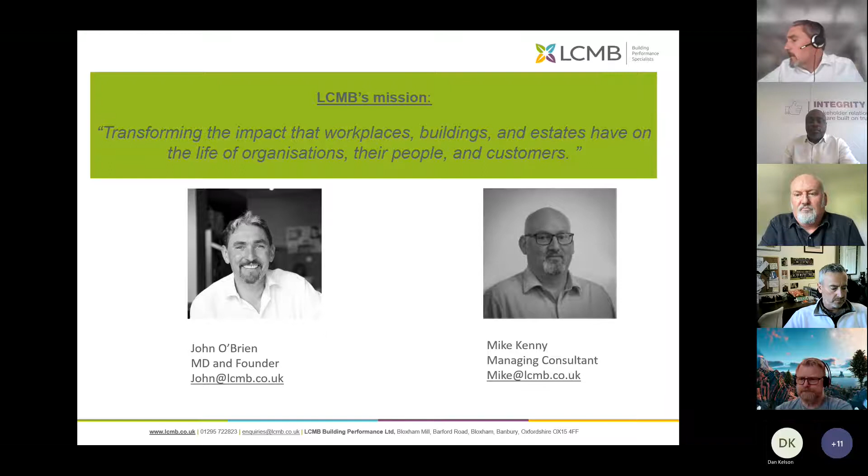So my name is John O'Brien. I'm the MD and founder of LCMB, for those of you who haven't met me. And Mike Kenny, my colleague, who's the managing consultant of our energy, carbon and net zero carbon team, will be chairing today's discussion. Just to say a little bit about LCMB, our focus is on transforming the impact of our clients' workplaces, buildings and estates. And part of that is helping our clients with the transition to net zero carbon.

So the objective for today is to share insights from our guests and Mike and tips for your route to achieving net zero carbon in construction, the construction and management and operation of built assets. So as a business, I guess we've been working with the UK GBC framework for delivering net zero carbon built assets over the last decade or so. Mike will say a little bit more about our recent work, but we've been involved in looking at both embodied carbon and operational carbon through the delivery of new built assets, refreshing existing built assets, as well as delivering net zero carbon strategies for scope 1, 2 and 3 across large complex buildings and estates.

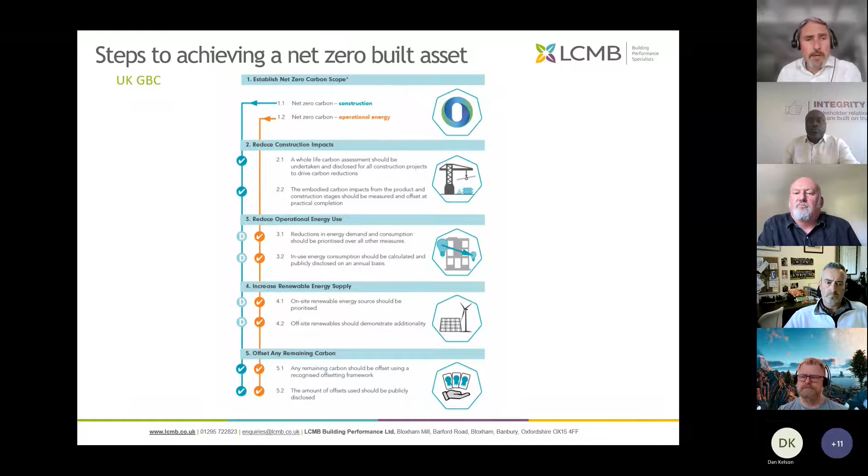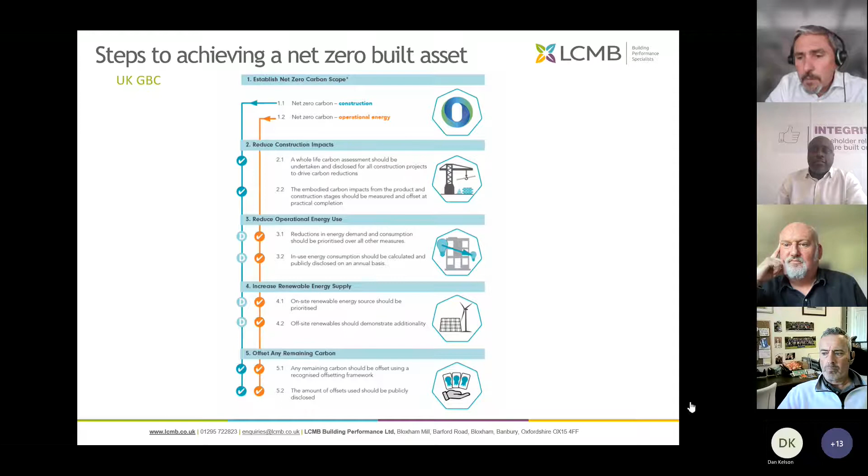So we've touched both the sort of new build, the operational side of built assets, but we're really interested to hear from both Stuart and Adi today as to their insights from the construction of, I guess, built assets at either end of the spectrum. Adi's involved in major projects and infrastructure, and Stuart's involved in delivering sustainable net zero carbon houses. So I'm going to pass to Mike, who will introduce himself and the guests and take us through the discussion for today. So over to you, Mike.

Hello. Yeah, thanks for joining us today. Just to introduce myself, I'm managing consultant here at LCMB. So I focus on the energy and carbon and net zero side of things, working with lots of different clients, higher education, NHS, commercial sector. Net zero has all become very topical and there's a lot of demand for it. And given the public sector decarbonisation scheme, even more incentive for people to decarbonise.

So I'd like to welcome Stuart and Adi, our two speakers for today. And if we could start with Stuart, if you could just tell us a little bit more about yourself and your presentation.

You're on mute there, but we can see the presentation. Okay, so is that better now? Can you hear me better? Mike? Yeah, we can all hear you. That's great. Okay, perfect.

Right, welcome everybody. My name's Stewart Dalgarno. I'm the Director of Innovation and Sustainability at Stewart Milne Group. We're a dedicated house builder. I'm also the Project Director for a large-scale UK flagship housing innovation project called AIMCH, which stands for Advanced Industrialised Methods for the Construction of Homes. This project is now complete. There is a website, which I'll come to at the end, where a lot of content is available for you to see and get good insight into.

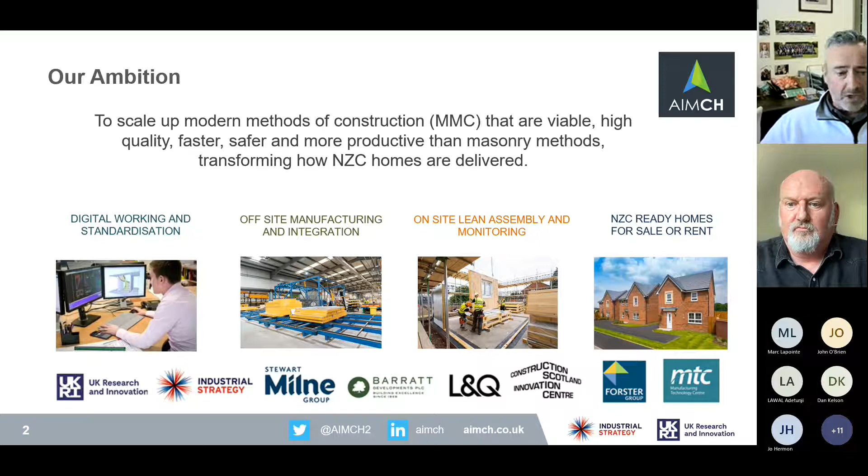And we've built homes to current regs, enhanced regs, and net zero carbon concept homes suitable for both the private development market and the affordable market. So as part of this project, our achievements have been to effectively build a net zero carbon home. We believe the first, called the Z House, by Barratt with Salford University. I'll talk more about it in a minute.

We've developed low carbon manufacturing systems, including full scale robotics for the production of panelised MMC systems at scale. We've also developed digital twin factories for net zero carbon factories to produce additional capacity to service the demand for MMC systems. And we've also done a little bit of work on embodied carbon, looking at the benefits of timber panelised MMC systems versus brick and block constructed homes.

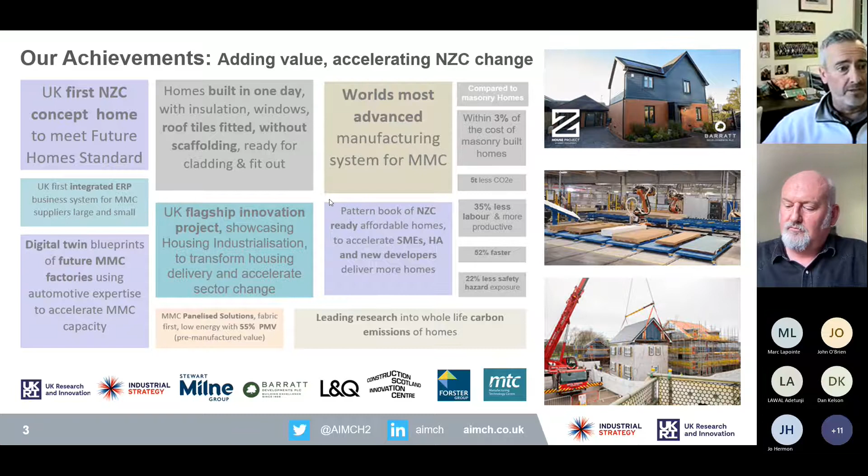Our focus has been on low-rise housing, and on a fabric-first approach, a sort of fit and forget solution to building a high-performance, low-energy fabric that drives the energy performance of the heating system down, and then decarbonisation after that. We've used techniques which are scalable and viable, so we're within 3% of the cost base of masonry, which is quite a good price point to be at. And some of the images you're seeing on screen there are some of the technologies we've used.

So for example, a closed panel, timber frame, fully insulated, sealed, windows pre-fitted, floor cassettes pre-manufactured up to 12 metres long by 3 metres wide, prefabricated party wall panels with the fire protection pre-fitted. Image in the bottom right, effectively a house built without scaffolding, using an edge protection system. And the house on the bottom left is a fully tiled roof built on the ground, lifted on. So that house there is at Barratt's development in Warrington.

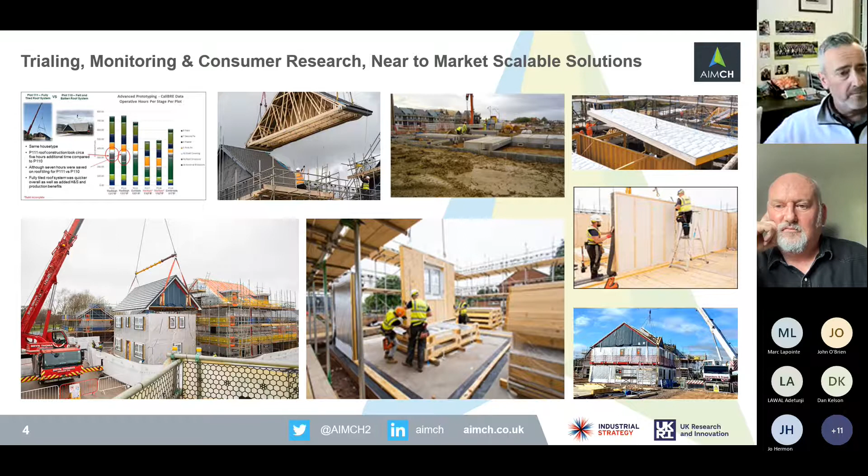So fully insulated to about a 0.15 U value, air tightness of 3, windows pre-fitted, plasterboard loaded in, floor cassettes on, roof on, no scaffolding, fully tiled in just under 7 hours. So that allows the contractor to effectively finish off the cladding by putting a brick veneer up the outside, a traditional cavity, or lightweight cladding if they wish, and fit out the remainder inside in terms of the first fix and second fix works. We've also looked at prefabricated foundations and modular roof systems, all of which have been monitored and trialled through having full-time research students on site doing time and motion studies. And that's given us the data to make really informed business cases.

The thing that's maybe most interesting to you is effectively the first net zero carbon home, which is known as the Z House. This was at Salford University with Barratt Homes. So the image on the left is one of their standard products. It's an Alderney house type, a common house type that Barratt Homes build. It's pretty much a vision of the future.

It's an MMC fully produced home, panelised systems with a lightweight cladding on the top and a prefabricated brick veneer on the outside. Inside, we've got vehicle grid charging, PV on the roof, PV diverters to the cylinders, an air source heat pump with storage, skirting heating, and infrared heating. So it's pretty much full of the type of technologies that are going to be used in the future.

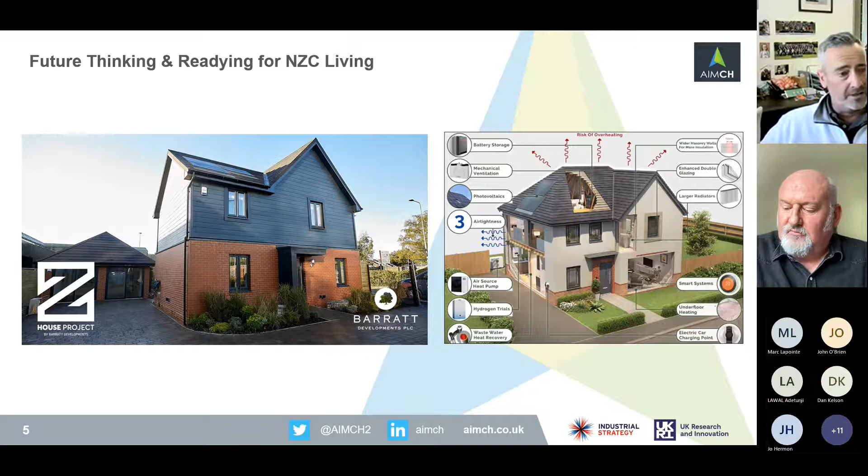And part of the project beyond this is to monitor that home and to have people living in it. It's got a lot of sensors in that building monitoring the performance of the home as we move to these kind of new technologies going forward, which are going to be our mainstream solutions for our transition to net zero carbon as a housing provider. In addition to that, we've looked at things like the manufacturing side of the MMC systems.

So embracing the car industry techniques that we've seen in images in the past, I'm sure, we find it difficult to get labour to work in these facilities. And if we can automate things and use some of the BIM technology with standardisation and components, we could then deliver higher output in terms of producing product at pace and at low cost, which is kind of the key output.

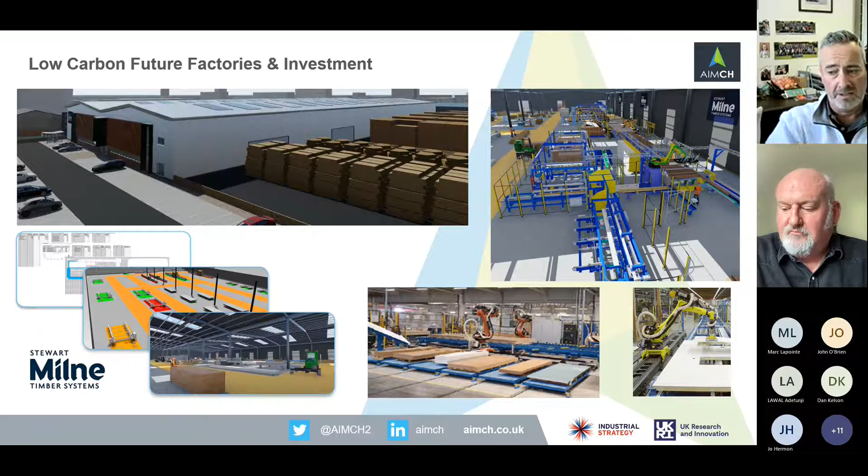Couple of things to finish off with then. We've also developed a pattern book of net zero carbon ready homes. So through our whole ethos of design standardisation, we've got a range of affordable homes, 18 homes in total, from a bungalow right through to cottage flats, which are compliant with the NDSS spatial standards, fabric ready to take a heat pump or can take a heat pump now, so they can be net zero carbon in the future. All crane friendly, panelised MMC friendly and optimised.

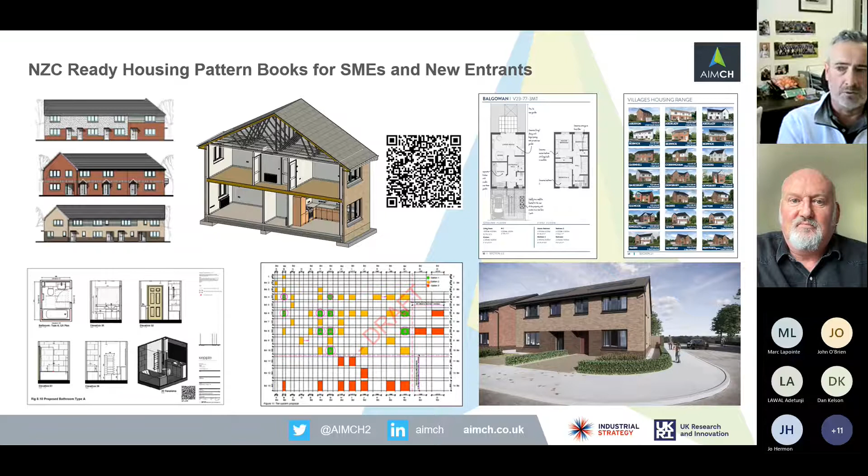And one example of that is the image on the left, which is essentially bathroom pods. So in the future, we could actually drop in a bathroom pod as part of the prefabrication element. So you might remember the first image on the slide was that shell being built in a day. If you imagine that shell being built in a day and that bathroom being dropped in, you've probably got 85% of the work content of the home completed off-site, being brought to site with a very smart way of building it on site.

So the last thing we did was embodied carbon, just to assess transition towards low carbon materials. As a house builder, we're interested in this. We've always used timber frame for our systems, but not everybody does that. It's quite common to use brick and block. So the first 2 columns are the ones worth looking at. 216 tons of embodied CO2 compared to 221 for a typical 4-bed detached home using timber panelised systems versus brick and block. So a 5-ton saving for a typical 4-bed home. And if you're building 10,000 homes a year, such as Barratt's and such like, that's a significant contribution.

You'll see the coloured graphs, actually the embodied carbon is all about in use, as you're probably aware. 80% of the embodied carbon is in use, about 14% is actually in the construction materials. So once you've solved the fabric, which going to timber is a good step in the right direction, then you'll start to look at decarbonisation of concrete floor slabs, the brickwork cladding on the outside, and for example, the concrete tiles used on roofs.

So we're already starting to look at solutions for that. We've got a couple of roof tile manufacturers who are using recycled products to make lightweight, low carbon roof tiling systems, for example, as a potential long-term solution to decarbonisation of concrete used in roof tiles for domestic dwellings as the next challenge.

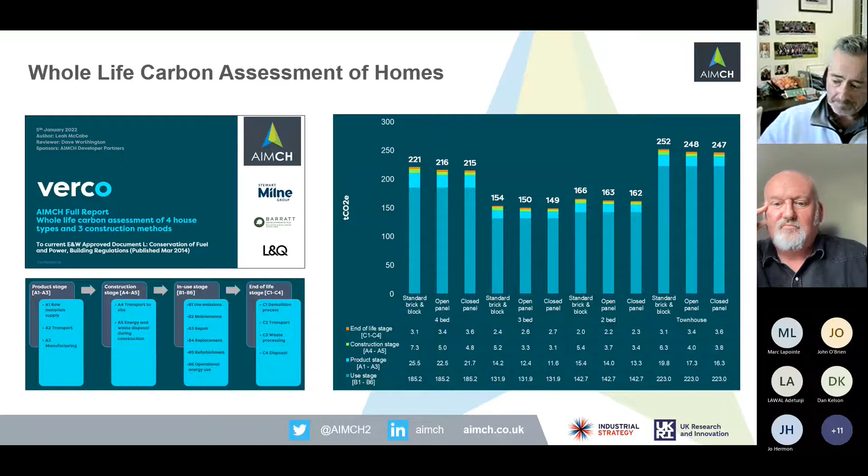That's it for my presentation. Very quick canter through it. If you want to see more information, I recommend you look at the website, aimch.co.uk. There is a wealth of information and all the work packages the project delivered, and it's a good starting point for anybody who wants to see any further information.

Brilliant, Stewart. Thanks very much. Thank you. Really good. I think you've just shown us the future. I think it's exciting. If I could ask you to stop sharing, and if Adi could start, we'll hand straight over to you, Adi. Okay.

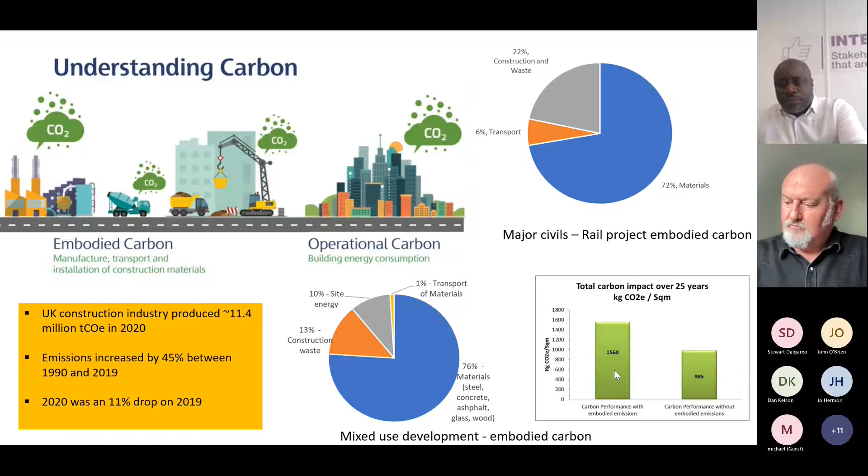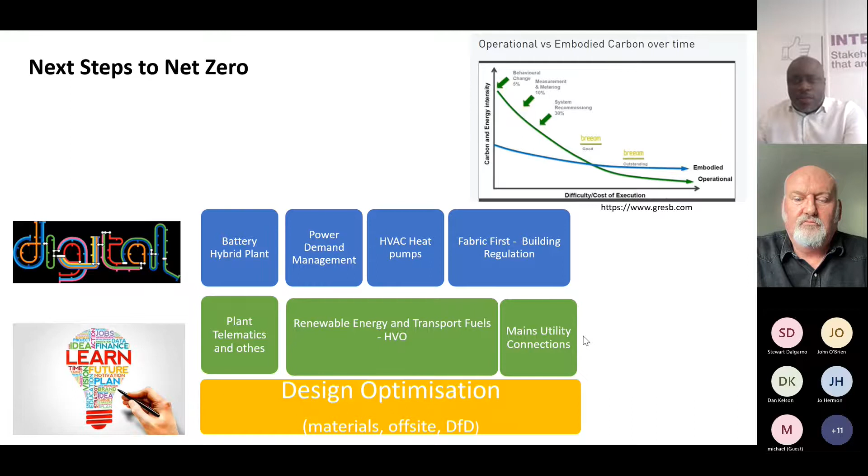So some big wins, the way I have seen it. Design is key. Using the right materials, off-site manufacturing, designing for deconstruction, those are really key. Things like fuels come in, utility connections, HVAC, heat pumps, building fabric, but importantly, with embodied carbon, you make the most benefit at design stage. So designing, getting it right, optioneering, using as much low carbon materials as you can. So within that material mix, that's really huge.

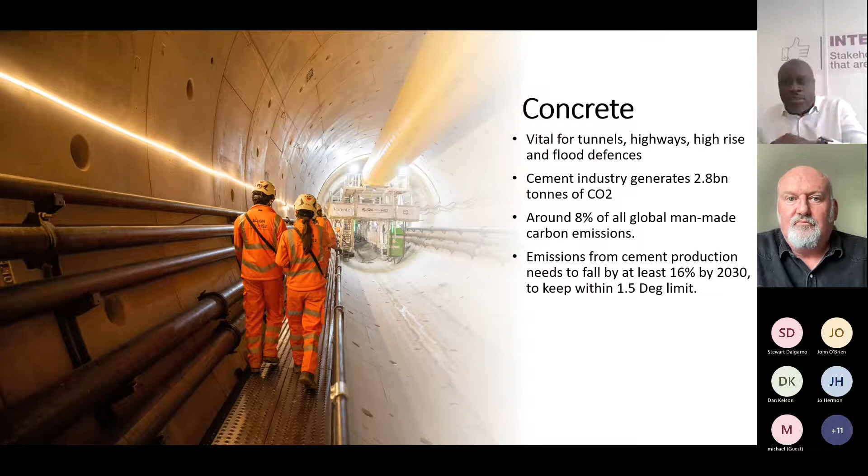The cement industry, which obviously is the backbone of concrete, generates some 2.8 billion tons of CO2, about 8% of global man-made carbon. For us to get to that 1.5 degrees, emissions from cement production have got to drop by something like 16% by 2030. So that's a lot of work.

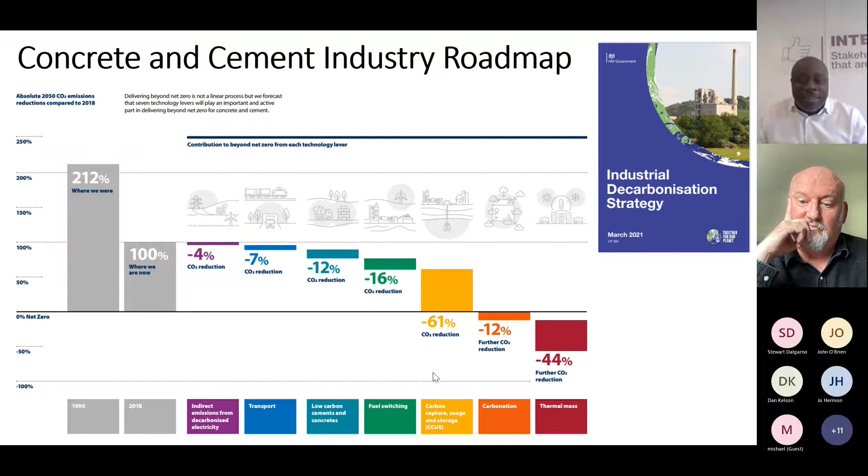On Align, one thing we've done, just going back to design optimization, we've got the longest rail viaduct in the UK once this project is complete. And at design, we sat back and we thought, really, do we have to construct it the way it's always been done? Does the width of this viaduct have to remain the same all through? Maybe not. Do we have to use steel and concrete all through on both the foundations and on the barriers? No. So we looked at it differently, and we're actually using glass.

We're using glass fiber rather than concrete on the walls of the viaduct. So all of that saved us 28%, and some 63,000 tons of CO2, and that's quite a lot just on the viaduct section of the project. So that's really looking at design. Do we have to build it the way it's always been built? No. If we just thought slightly differently, used a few materials differently here or there, it will make a difference.

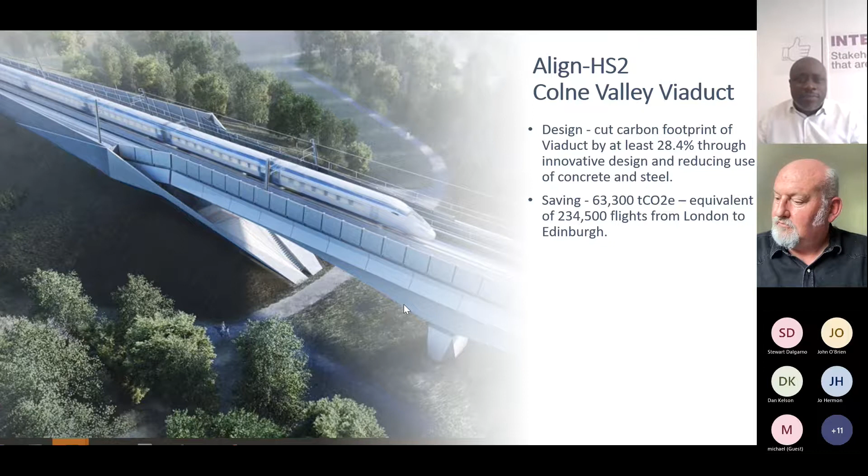The other big one is steel. Steel is quite key. Huge volumes of steel have to go into major civils construction. Now, how do we cut down on steel? There's a lot been spoken about recycled steel, but really even recycling steel has got an impact to it. So what do we do? In my view, we've got to go back to nature and think, well, what can nature bring to us that can reduce this?

And one of the things being looked at the minute, apart from trying to make steel manufacturing much less energy intensive, is beginning to use things like basalt rebar. It's something that's just come up recently, a new innovation. What that's trying to do is take basalt as a material, make it into fibers, and actually use it in concrete. That way, you're using a material that doesn't have to go through the massive furnace and steel manufacture process that current steel has to go through. So another thing that's on the plate as we stand.

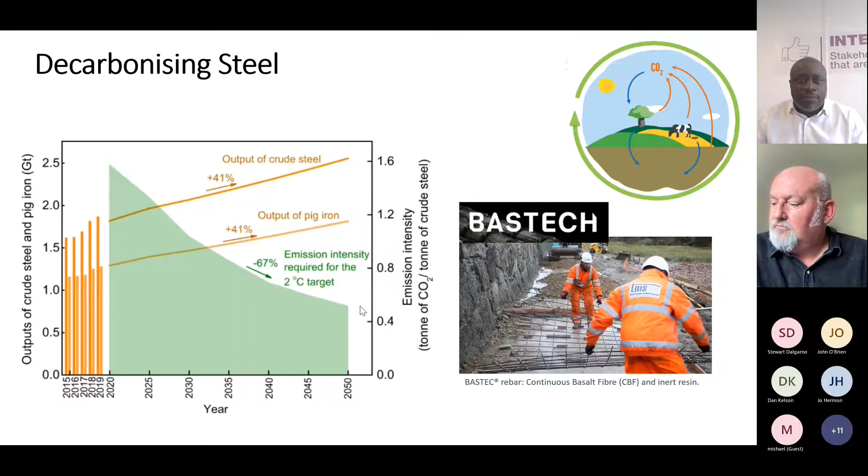But technically, for the steel industry to contribute meaningfully to the 2°C target, it's got to go from approximately 1.5 tons of CO2 per ton of steel down to 0.5. So quite a lot to be done there. Part L is helping. Part L 2022, which we're all familiar with, I guess, aims for a 27% reduction in operational carbon. That would help us as well on the operational side. Fabric U-values being dropped significantly, ventilation heat recovery being brought in, and PV really becoming key to achieving the reduction we're after.

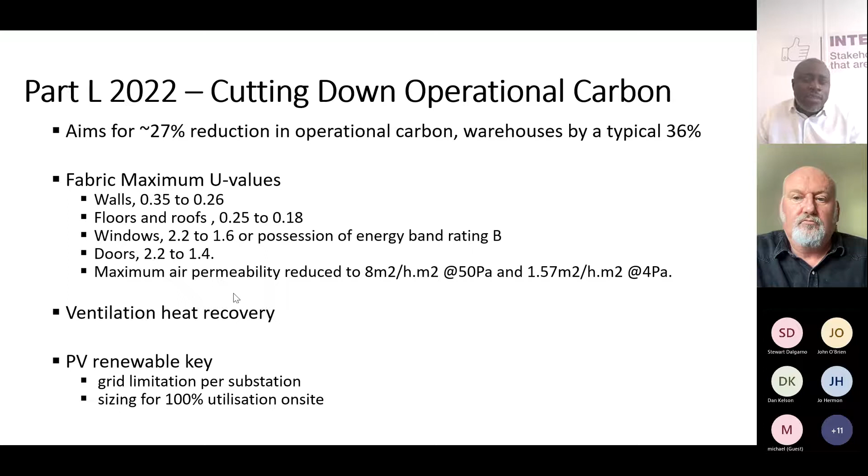And then, of course, the big one is, how do we decarbonize the grid? Because decarbonizing the grid means that every kilowatt hour of energy that goes into manufacturing our materials and into the process of construction is green. The Hydrogen Association have come up with a rollout plan, and there's a lot still to be done, but critically, for all that renewable energy being generated, one way to ensure it's useful and is stored is hydrogen, because you can use renewable energy to generate hydrogen and transport that hydrogen. Batteries have been spoken of. Batteries are great, but the world at some point is potentially going to run out of lithium, cobalt, and the other rare earth metals required.

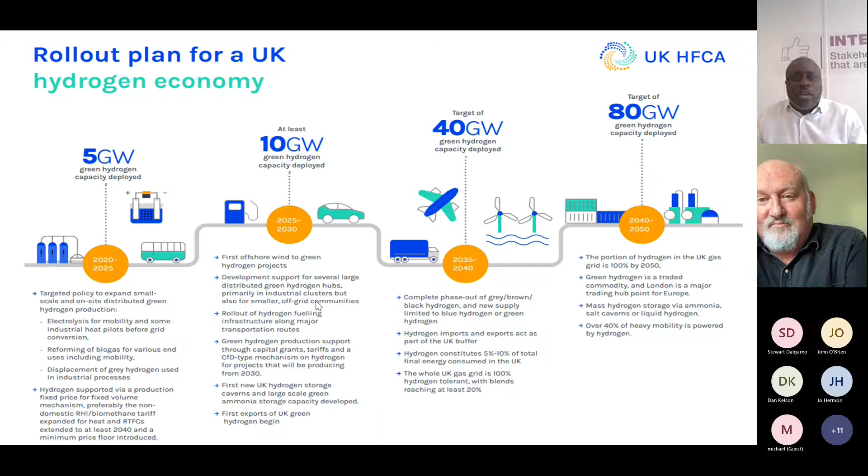So in construction, what are we doing? There's still a strong case for hydrogen hybrid plant. I think hybrid is quite key. A bit of hydrogen, in some cases battery, and in some cases traditional fuels. We're looking critically at dual fuel sweepers, our tower lights being hydrogen powered with battery backup, hydrogen hybrid generators, and also piling rigs. That's an innovation that's just coming up with Skanska and Ulemco. I don't work for Skanska, but I think what they're doing is great. So those are some of the things we're looking at in the industry, there's a whole raft of things, but I'm sure some of this will come up in the questions.

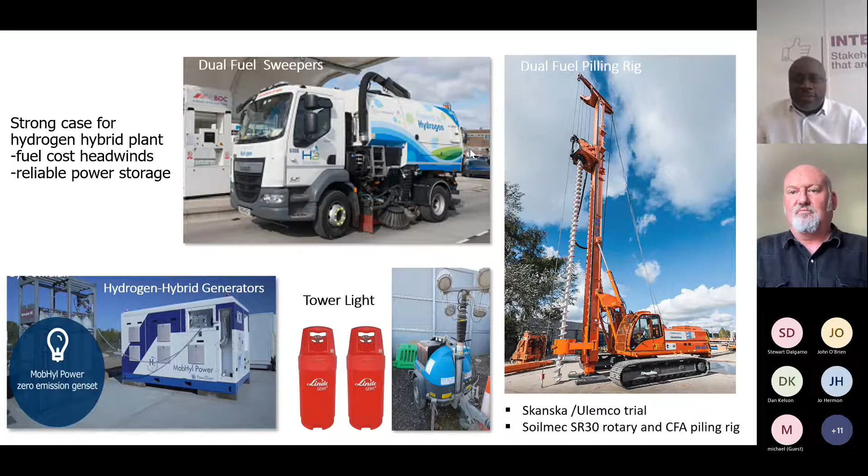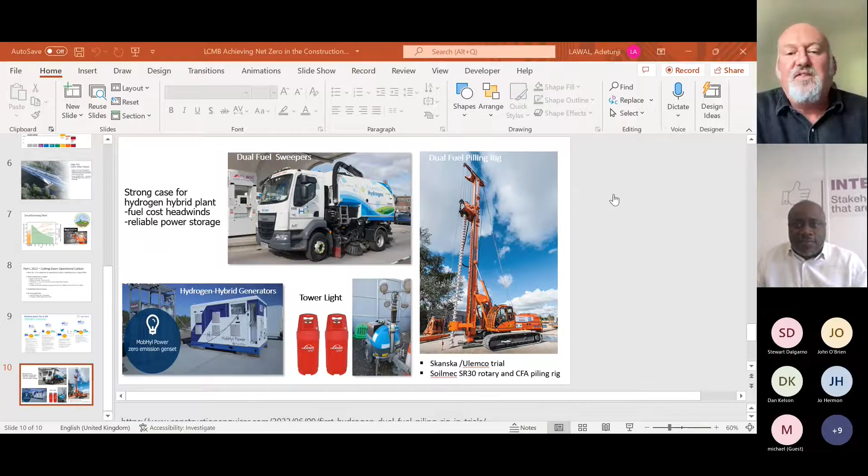Thanks, Adi. That was great. It just makes you think. Construction has come such a long way in such a short space of time, where we used to think of steel, concrete, block and glass, and now we're using completely different materials, and they all have that carbon saving aspect, which is great, and that's how we're going to achieve net zero in quite a short space of time.

So I was just going to ask you a few questions and then maybe take some questions from the floor. If I could address this to Adi first. What do you think is the biggest carbon reduction challenge facing the construction sector, and how do you think it can be overcome?

I think the biggest is concrete and steel, how we decarbonize them. There's a lot of zero carbon concrete out there that's been spoken of, but you couldn't just build a highway or tunnel or viaduct on a whim of, oh, I think it's going to work. No, there have got to be design codes. This concrete has got to be tested over years in many cases.

So whilst there's a lot of innovation coming up, there is still a time lag to establish that confidence for the design team to say, yes, that material is great. It's worked for 3 months, but yes, if I build a tunnel with it, it will last for 100 years. So there is a bit of a lag, and I think that lag is perhaps the biggest issue. It will take a few years.

Sometimes the cycle is like 5 to 10 years between concept innovation to that particular product actually being used on a large scale in a long-term civils construct. Yeah, so concrete and steel, they're still the biggest ones in the room. Stewart, you're not using any of those materials, and you're using the timber alternative. What do you think is the greatest challenge facing the industry?